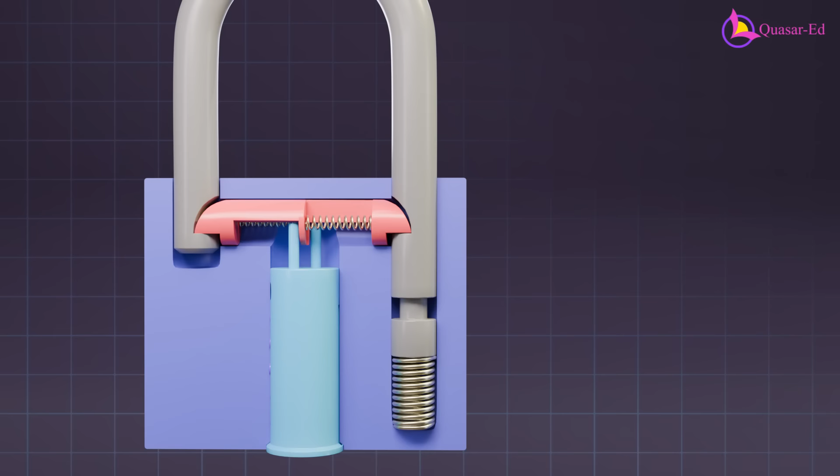The cylinder, located underneath the pawls, contains two sets of pins. When the correct key is inserted and the cylinder is rotated 90 degrees, it retracts the locking pawls, releasing the shackle.

In some designs, steel balls are used instead of pawls to lock the shackle. These balls are driven by a cam on the cylinder. When the cam rotates to the unlocked position, it allows the balls to move inward, releasing the shackle.

The purpose of the key is to rotate the cylinder, but only with the correct key. In a pin tumbler lock, this is done using driver pins that intersect with the cylinder, preventing it from rotating.

Inside the cylinder, there's another set of pins called key pins, each with a different length. When the correct key is inserted, the key pins align with the notches on the key, creating a shear line

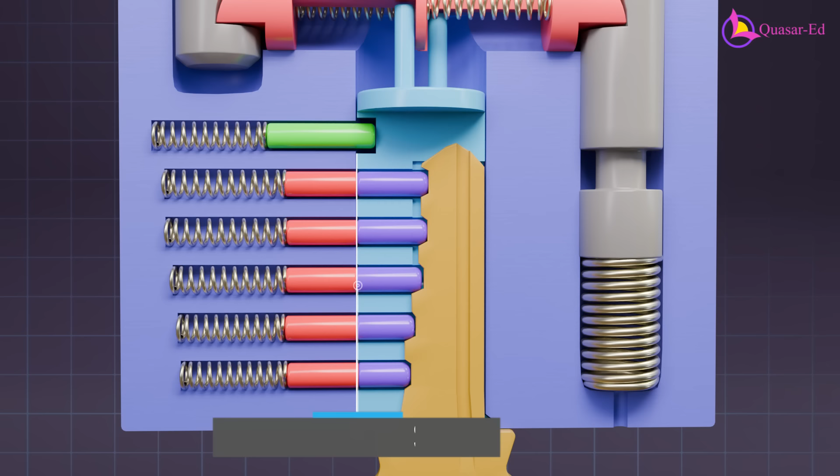with the driver pins at the edge of the cylinder. This allows the cylinder to rotate and unlock the shackle.

If the wrong key is inserted, the pins will not align correctly, preventing the cylinder from rotating. The number of pins and the shape of the key can vary depending on the manufacturer, but the key must align the pins correctly to unlock the lock.

This design is both ingenious and easy to manufacture, which is why pin tumbler locks are still widely used today. However, there are some downsides.

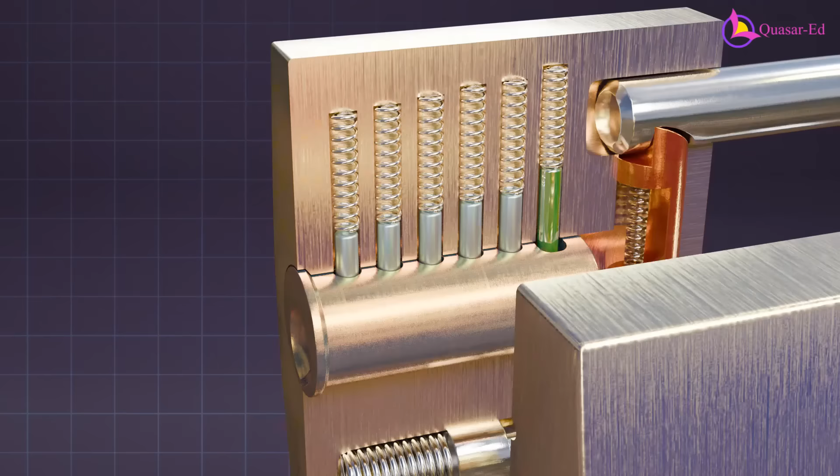Pin tumbler locks can be relatively easy to pick due to the tolerance between the parts. For example, when you apply tension to the cylinder using a tension wrench, one of the pins will be under more tension than the others.

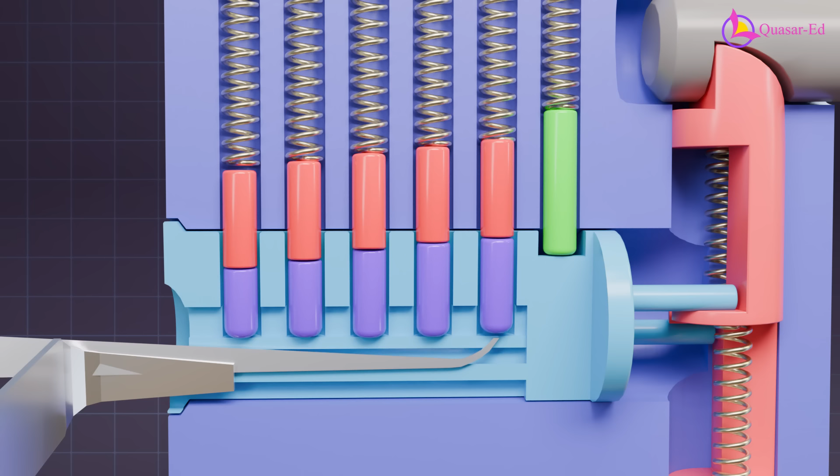By feeling and lifting each pin with a lockpick, you can identify the one under tension, which is harder to lift. Once that pin is lifted, the tension is released, and the driver pin moves out of the cylinder, getting

stuck outside the cylinder wall due to the slight turning of the cylinder. You then move on to the next pin, and by repeating this process, you can eventually pick the lock.

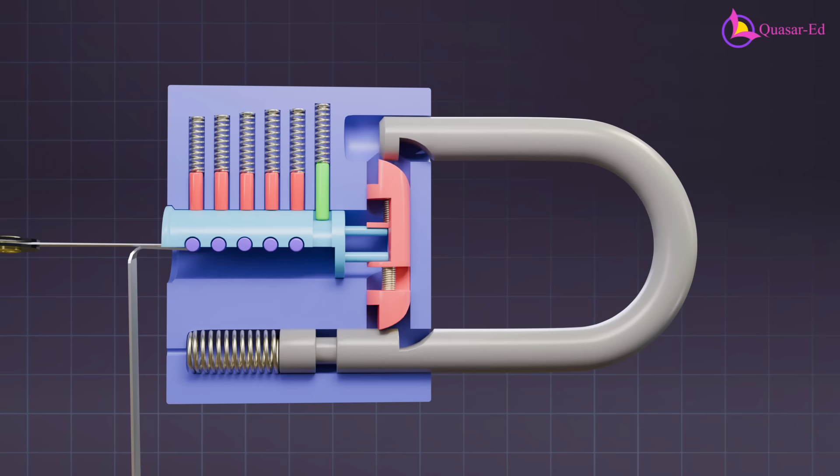There's an even easier way, using a tool called a wave rake, named for its wavy shape. Just like before, you apply turning force with a tension wrench, then move the wave rake back and forth inside

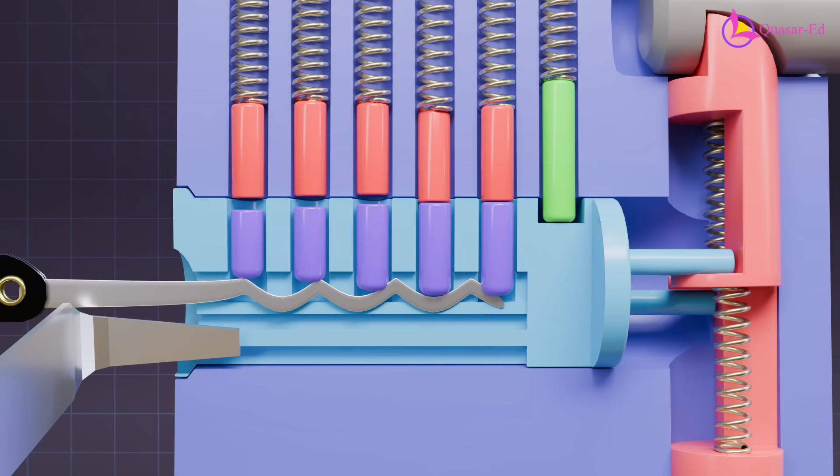the cylinder. This causes the pins to move up and down randomly until all the driver pins are released from the cylinder. Or, if the lock has enough space behind the pins, all the pins can be moved out of the cylinder by using this comb pick.

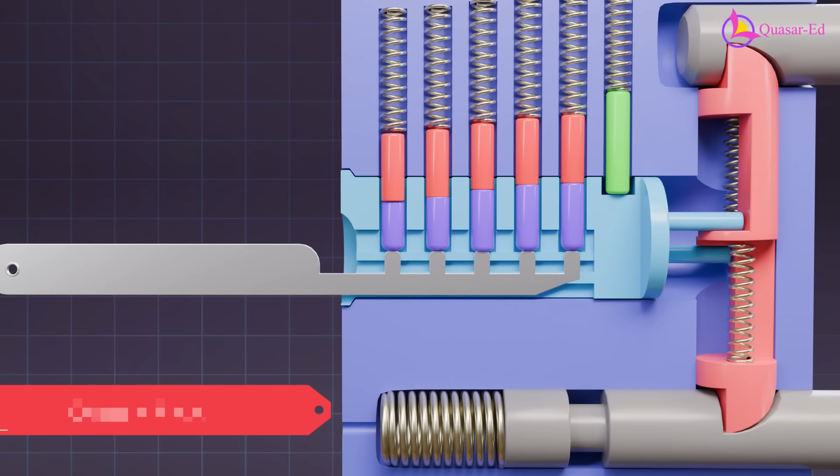Of course, not all locks have that vulnerability, but some still do. Finding the right tool makes all the difference when tackling any challenge.

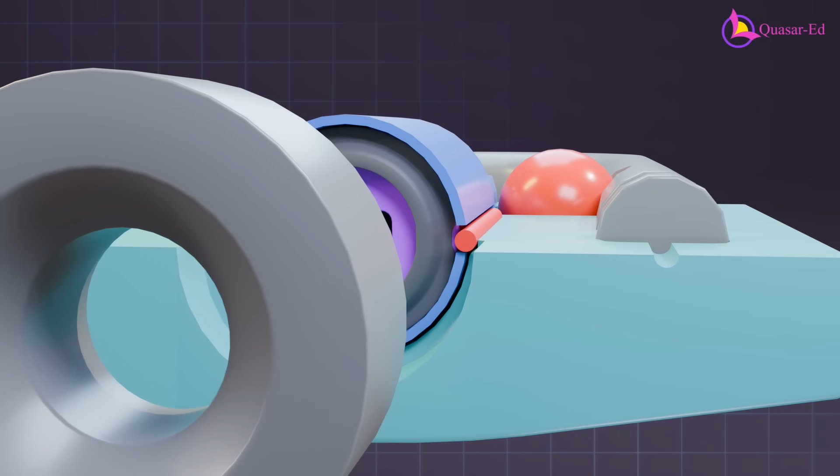Now, let's look at the disc detainer lock. It also uses a cam and ball mechanism to lock the shackle. Unlike the pin tumbler lock, the cylinder is prevented from rotating by a sidebar, which partially sits in a groove outside the cylinder.

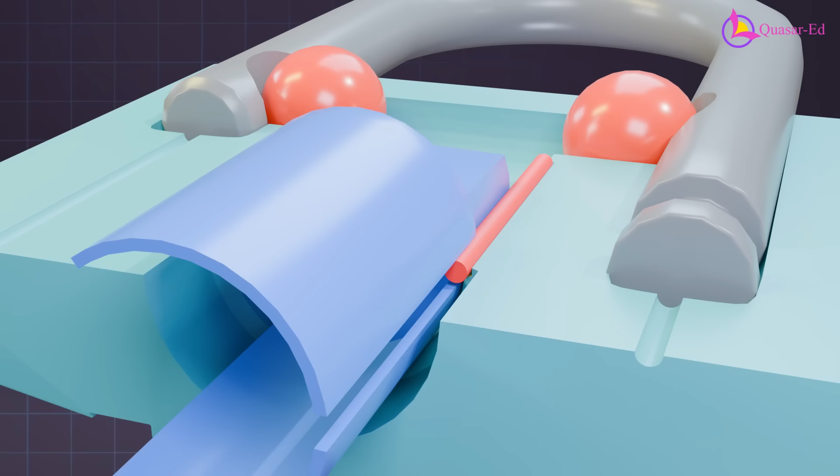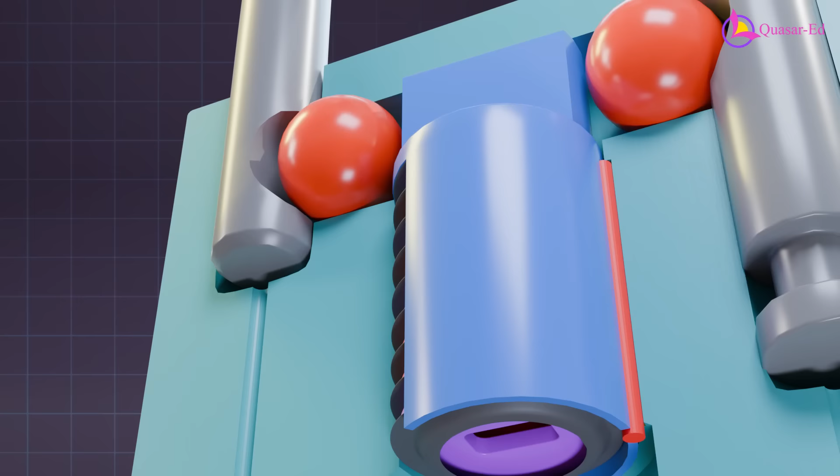The cylinder is more like a shell with two cut sections, and this narrow cut line usually aligns with the sidebar. Inside the cylindrical shell, there are stacks of discs with a keyhole in the center. In the locked position, the sidebar fits between the cut line, preventing the cylinder from rotating.

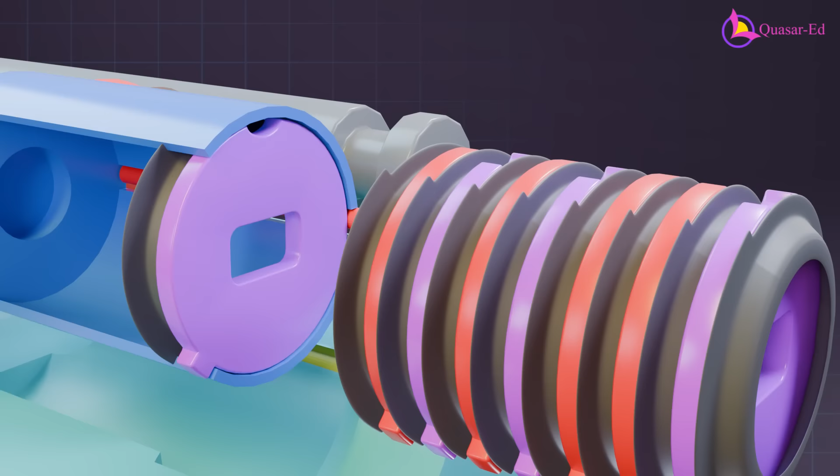Looking at the stack of discs, we see two types: those with rectangular holes, called drive discs, and those between them, called spacer discs. Drive discs have small extrusions that allow the disc to rotate 90 degrees inside the cylinder. They also contain notches or gates.

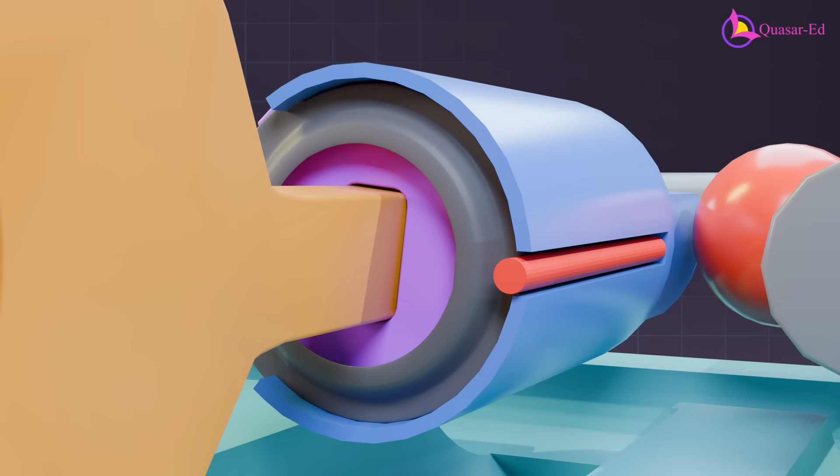When the correct key is inserted and rotated 90 degrees, all the notches align with the sidebar. Continuing to rotate the key causes some extrusions to push against the cylinder edge, which in turn pushes the sidebar into the notches, allowing the cylinder to rotate. The cam's rotation then moves the balls inward, unlocking the shackle.

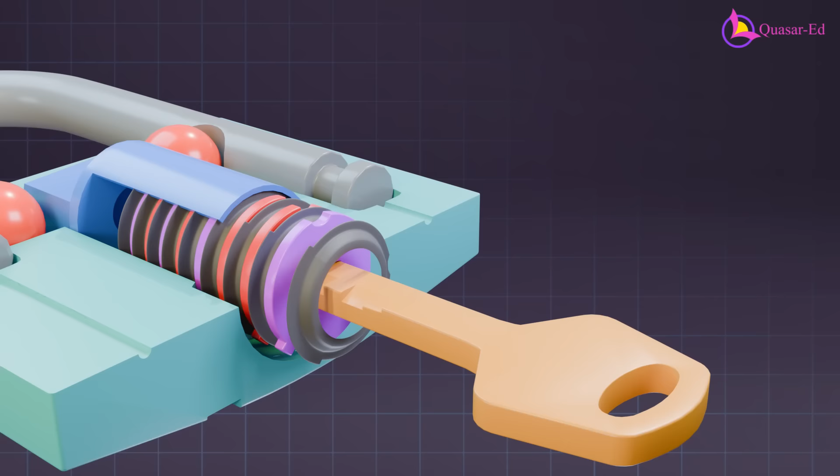Unlike the pin tumbler lock, the key cannot be removed after opening the lock. To remove the key, the lock must be closed because the rectangular holes in the discs only align in the locked position. In that position, the notches are misaligned with the sidebar and are in random positions.

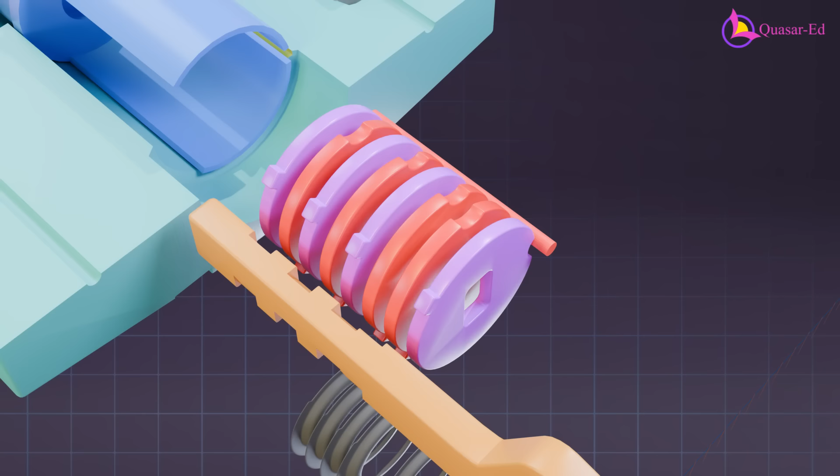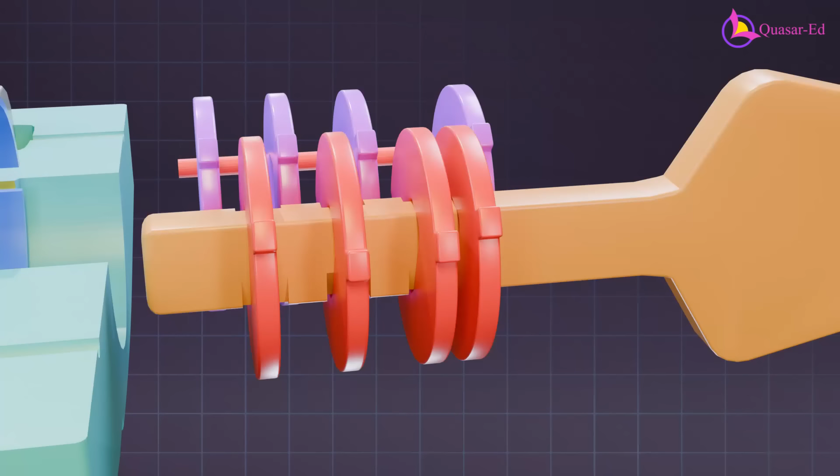The key is cut to match each disc's notch position. If you look at the key, there are uncut sections between the cuts. The discs corresponding to these uncut sections rotate fully with the key, aligning their gates at 90 degrees. The other discs, which align with the cut sections, only start to rotate after a certain angle, depending on the depth of the cut. The key can't be removed because of these discs blocking the uncut sections.

When the key is rotated 90 degrees, the gates align with the sidebar. If you continue rotating, the limit notches push the cylinder, and since the sidebar is aligned, it moves into the gates, allowing the cylinder to rotate further and unlock the lock.

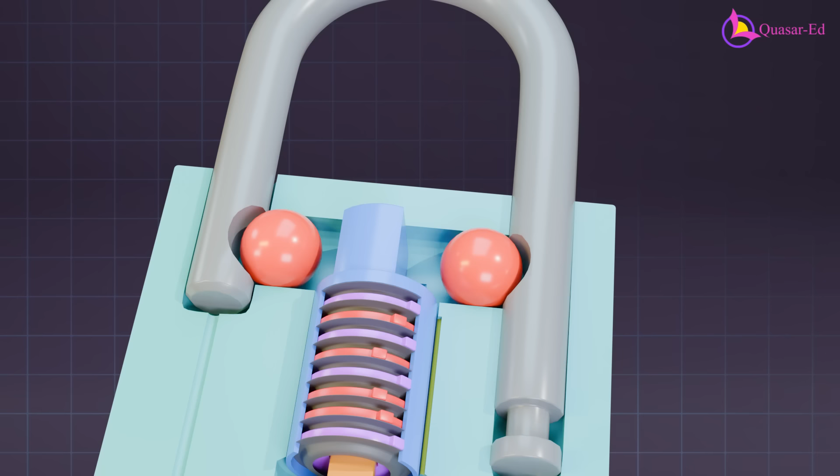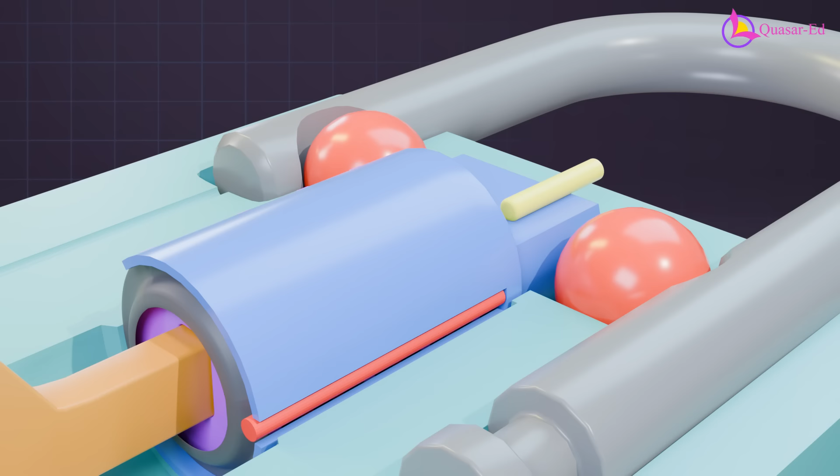To relock, you rotate the key in the opposite direction. Since the sidebar is already inside the gates, it pushes the cylinder until it aligns with the outside groove. At this stage, the cylinder cannot rotate further due to the limit pin on the top, so the rotation of the discs pushes the sidebar out of the gates and into the groove, locking the cylinder in place.

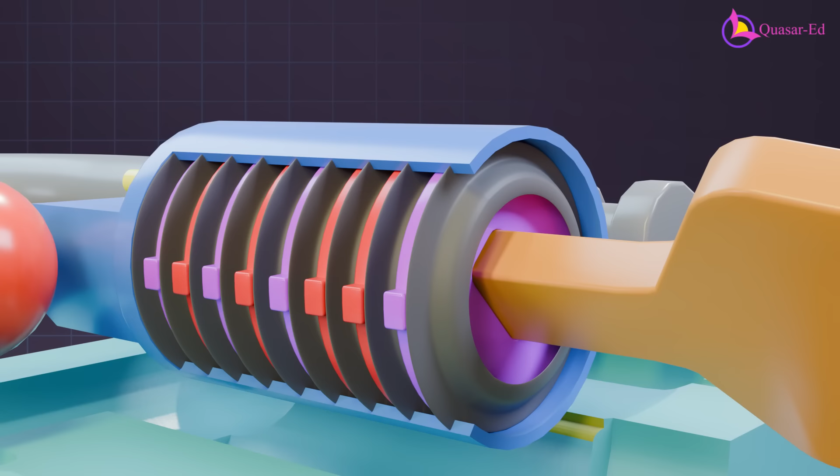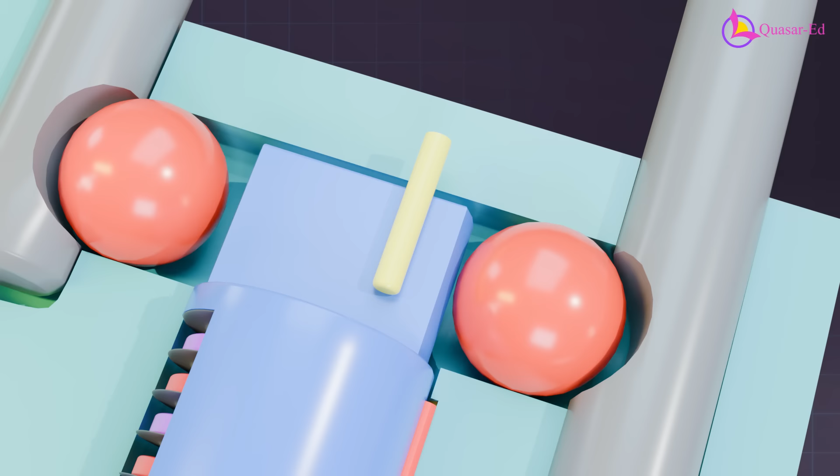The discs aligned with the uncut sections of the key rotate fully, while those aligned with the cut sections rotate according to the depth of the cuts, eventually aligning so the key can be removed. A locking pin above the cylinder limits the cam's rotation to 90 degrees back and forth, ensuring that the sidebar always ends up in the groove when locked.

However, disc detainer locks can also be picked, but it's much more difficult than with pin tumbler locks. A specialized tool like this one is needed to pick a disc detainer lock. This tool has two concentric shafts. The outer shaft applies torque to the cylinder and the sidebar, while the inner shaft rotates each disc. The inner shaft can be moved along its axis to pick each disc individually.

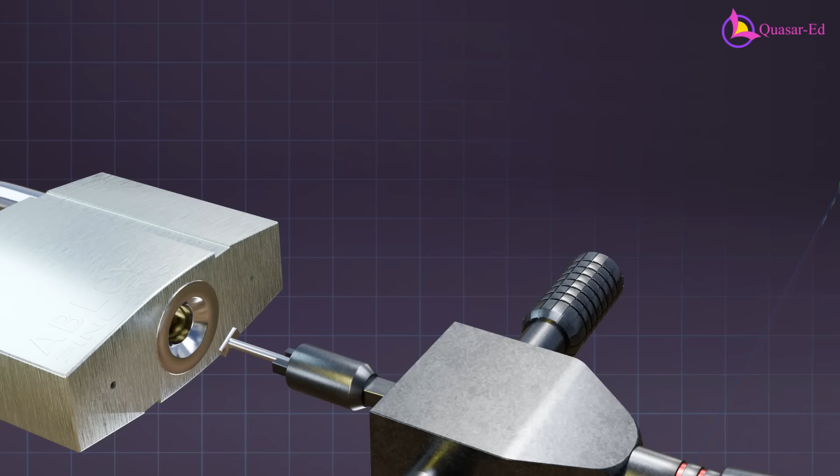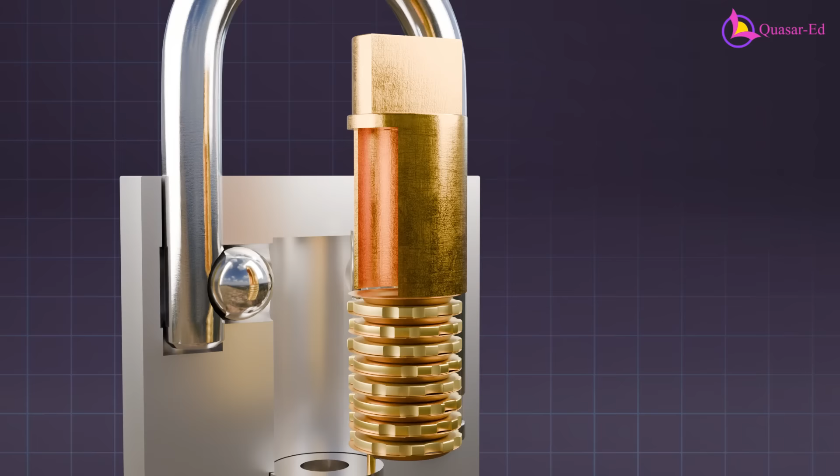Like with any picking technique, the discs are rotated, feeling for tension or listening for clicks until all the gates are aligned. In more secure disc detainer locks, there are additional shallow notches on the discs called false gates, making picking much more difficult.

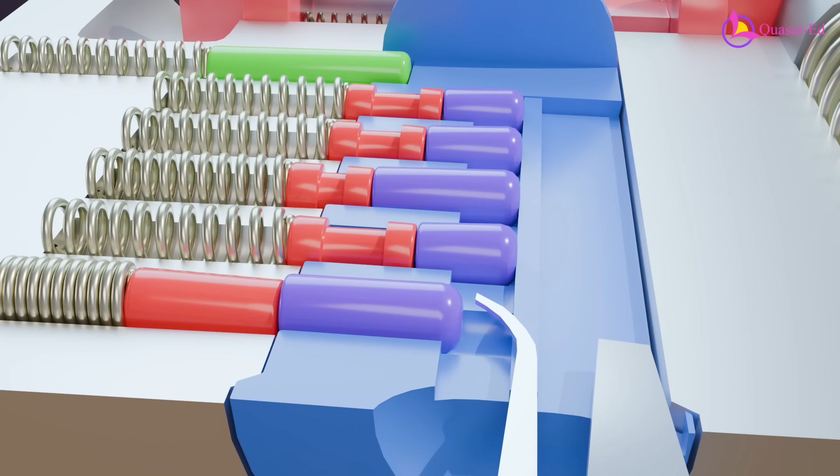High-end pin tumbler locks use a similar concept with spool pins. These pins have extra edges, making it difficult for a lockpicker to tell if a pin has been fully released or just caught on an edge. However, if the pin is pushed further, the transition from the narrow to the wider section causes a slight counter-rotation of the cylinder. By sensing these counter-rotations, the lock can still be picked.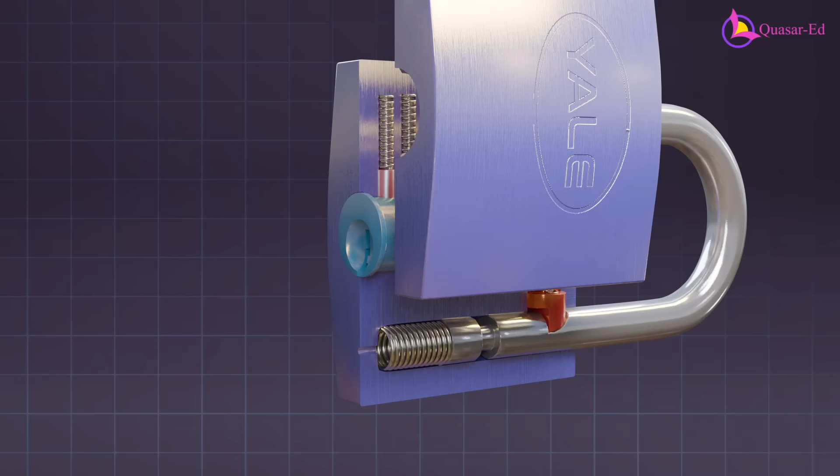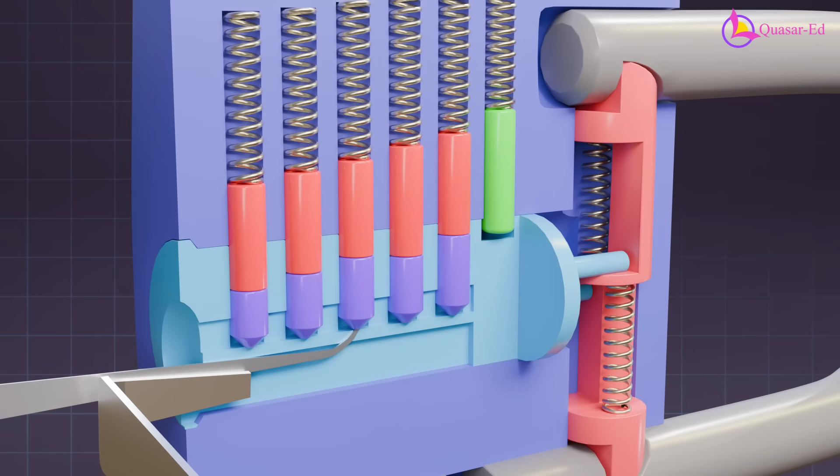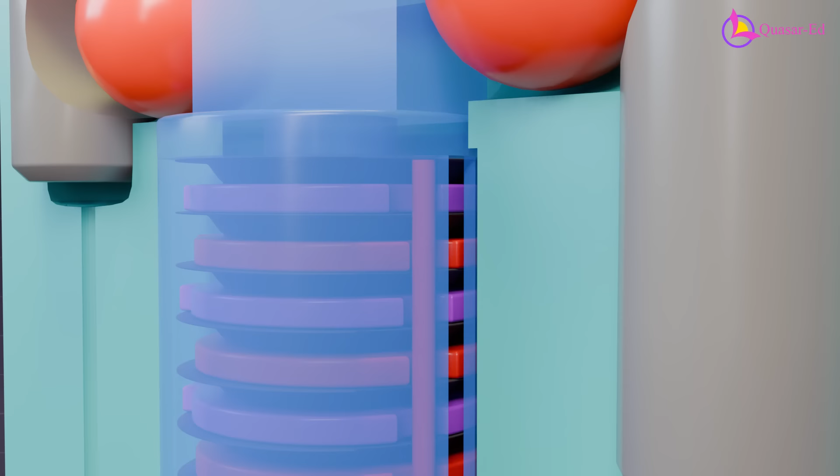Another important factor in locks is tolerance. In a pin tumbler lock, if the pins and holes fit perfectly with tight tolerances and stronger springs, picking the lock would be much more difficult, if not impossible. However, achieving such precision is often not cost-effective for mass-produced locks. Even in disc detainer locks, low tolerance in the gates and balls can make them easier to pick or break. So, depending on what you need to secure, it's crucial to choose the right type of lock carefully.

No matter how secure a lock is, there are always those who challenge its security and find flaws. Then someone invents a more secure lock, and the cycle continues. This feedback loop drives our society to constantly improve.

So why not just use more secure locks, like disc detainer locks, instead of pin tumbler locks? One reason is that most people aren't aware of which type is more secure, and the likelihood of having your lock picked is actually very low. We also share a collective belief that if something is locked, it shouldn't be broken. That's why we use a variety of locks, regardless of which one is more secure.

For those determined to break in, any lock can be defeated, even with just a hammer. But that isn't necessarily a bad thing, because if we ever lose our keys, we might be the ones swinging that hammer.